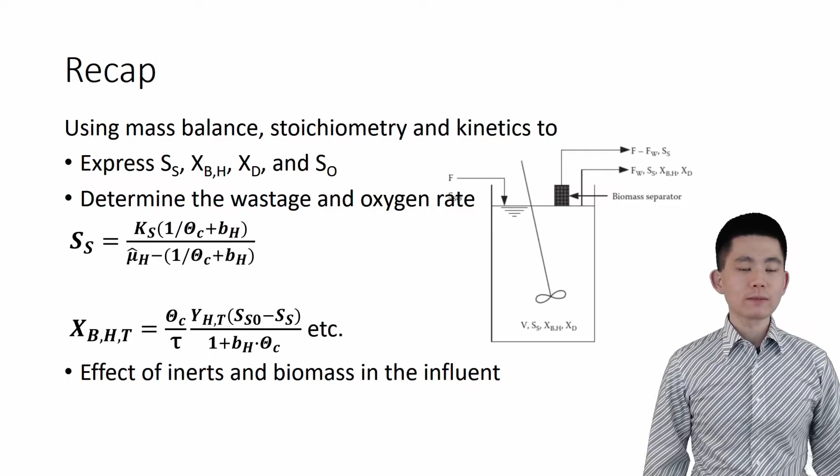Then we extend the model to more complicated influent that contains biodegradable and inert particles and active biomass. In real life, instead of an ideal biomass separator which represents an ultrafiltration membrane, the conventional configuration with a clarifier to settle down the solids after the reactor is more commonly used, especially in water resource recovery facilities.

We can use the same principles to model the conventional configuration, but with three assumptions. After settling, the concentration of recycled MLSS equals that of the wasted MLSS. The MLSS settles uniformly, meaning that the active fraction of MLSS does not change.

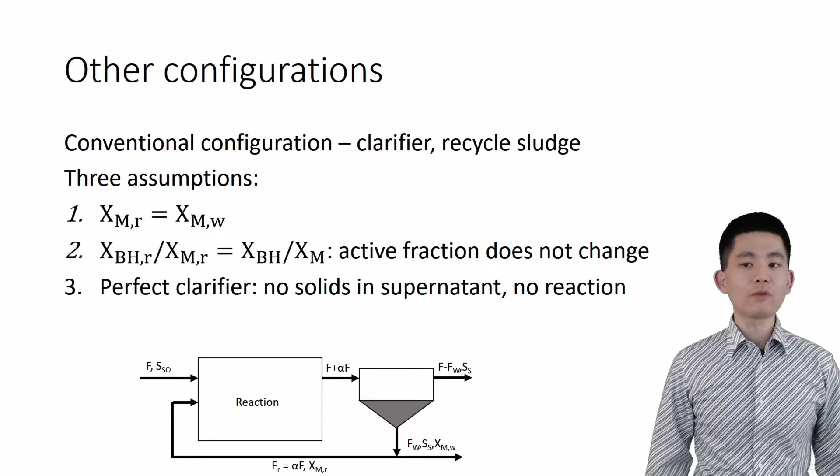Finally, the clarifier is a perfect clarifier, which means all solids entering the clarifier quickly settle, leaving no solid in the supernatant. Therefore, no bioreaction occurs in the clarifier.

Then we can write the mass balance for MLSS for the overall system. This is the boundary for the entire system that we are investigating. Because there is no biomass in the clarifier supernatant, the mass of biomass in the influent minus the mass of biomass wasted plus reaction equals 0 at steady state. This is essentially the same as the biomass separator.

We can then look at the mass balance in the clarifier. Now the system boundary becomes this. Because there is recycling, the clarifier influent flow rate is F plus FR. The supernatant is still 0, as all MLSS is settled in the clarifier.

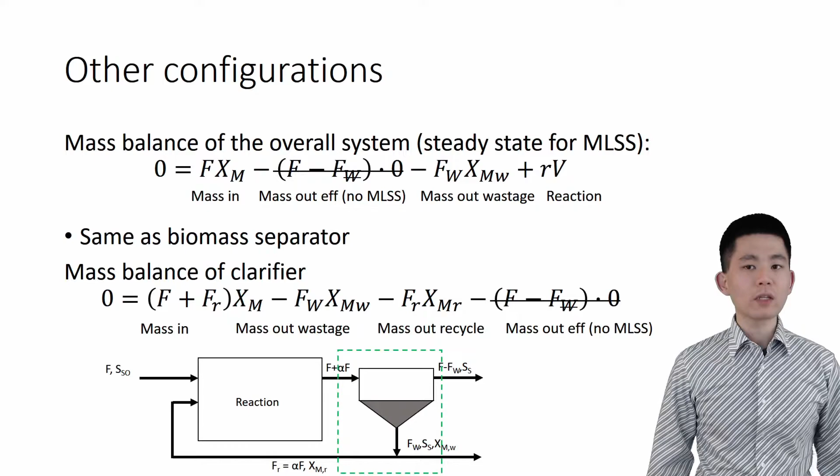From the mass balance, we can use the influent flow rate, wastage flow rate, and recycle flow rate to express the ratio of MLSS in bulk solution and MLSS in waste streams. Therefore, we can express SRT with this equation.

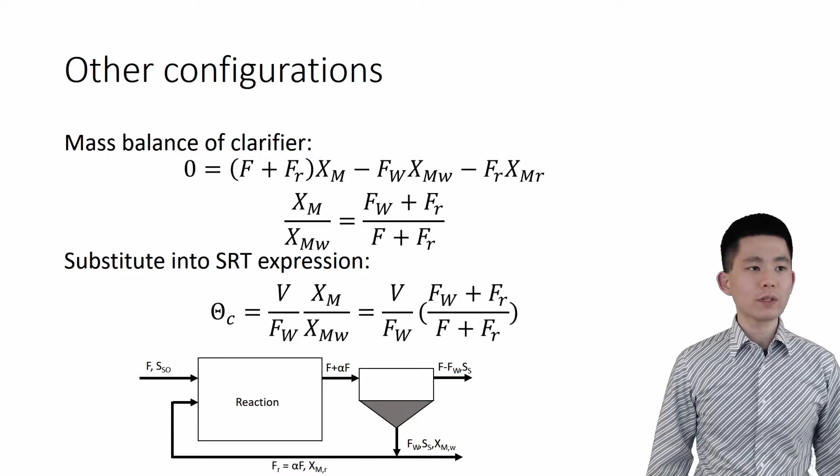Although I have said that conventional CSTRs are most commonly used, in real life, the reactors are designed to be parallel long rectangular reactors that are not completely mixed along their axis, but perform more like PFR, in which the substrate degrades along the reactor. We can model this as CSTR in series, or using the differential volume method that I introduced in topic 8. But the mass expression and solution can be very complicated.

To simplify, we assume that the variation of biomass in the reactor is minimum. This assumption is valid when SRT is over 5 times higher than HRT.

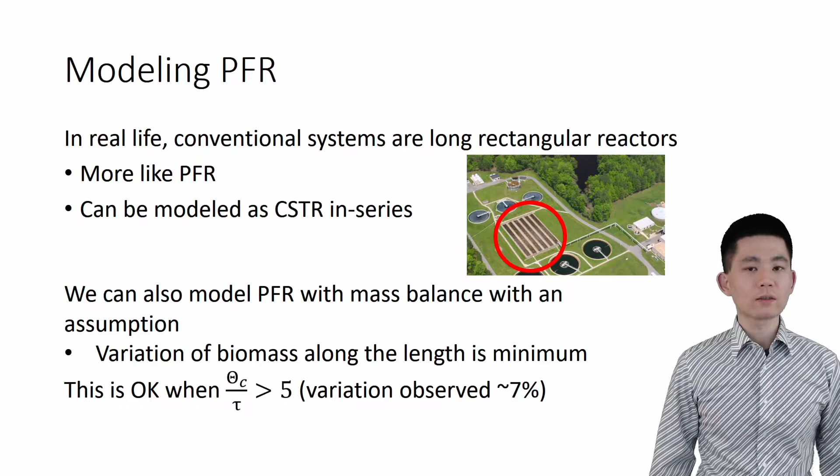We can conduct a steady-state mass balance of the active biomass in the whole system of PFR, followed by a clarifier. We assume that the active biomass concentration XBHT average is uniform in the reactor. There's no influent biomass. The extra active biomass grown in the system is wasted.

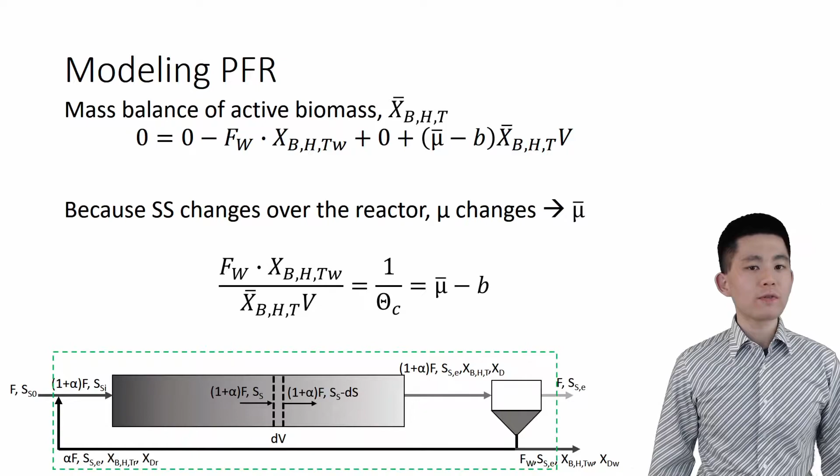Please note that mu average represents the average specific growth rate, as the specific growth rate is a function of substrate concentration, which changes along the reactor. After rearranging, the expression becomes familiar: 1 over SRT equals the average specific growth rate minus the specific decay rate.

Let's do a steady-state mass balance of substrate in a differential volume. The mass of substrate in minus the mass of substrate out minus the degradation equals 0. After simplification, we can substitute the Monod equation in this expression.

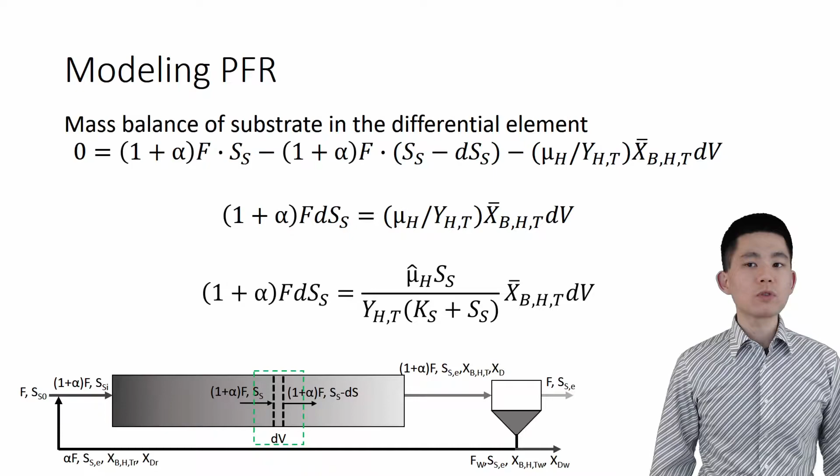We can then integrate both sides of the equation from the entrance of the reactor to the exit of the reactor. This is equation 1 from the substrate mass balance.

SS0 is the influent substrate concentration before being combined with the recycle flow. SSI is the influent substrate concentration after combining with the recycle flow. And SSE, the reactor effluent substrate concentration, are all used in equation 1.

To find their relationship, we need to focus on the entrance of the system. At the entrance, the influent flow combines with the recycle flow before entering the reactor. So the flow rate becomes F plus alpha F, and the substrate concentration changes from SS0 to SSI. We can conduct a mass balance at point 1, the combining point. SSI can be expressed with SS0, SSE, and recycle rate alpha with equation 2.

Knowing equation 1 and equation 2, next let's conduct the steady-state mass balance of substrate for the entire system. At this point, can you pause this video and try to work on this yourselves?

So the mass of substrate that gets in the system through the influent per time, minus the mass of substrate that gets out of the system through the clarifier supernatant per time, minus the mass of substrate wasted per time, minus the degradation, equals zero.

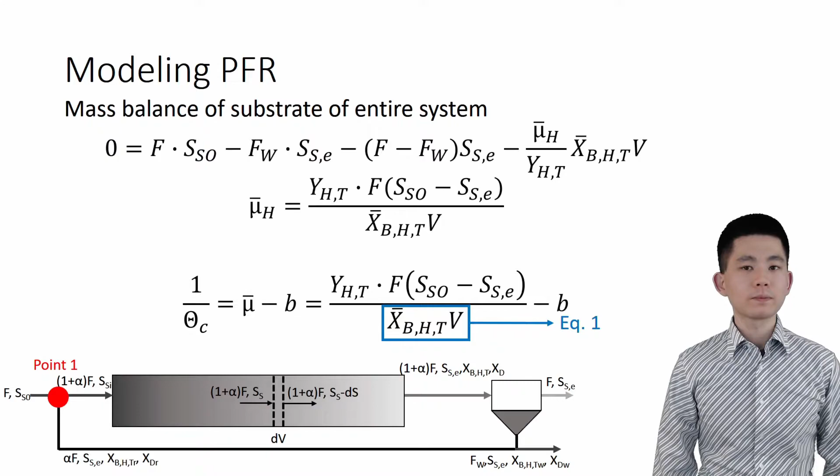After rearranging, we can find that SSI minus SSE can be substituted by equation 2, and this gets us equation 3.

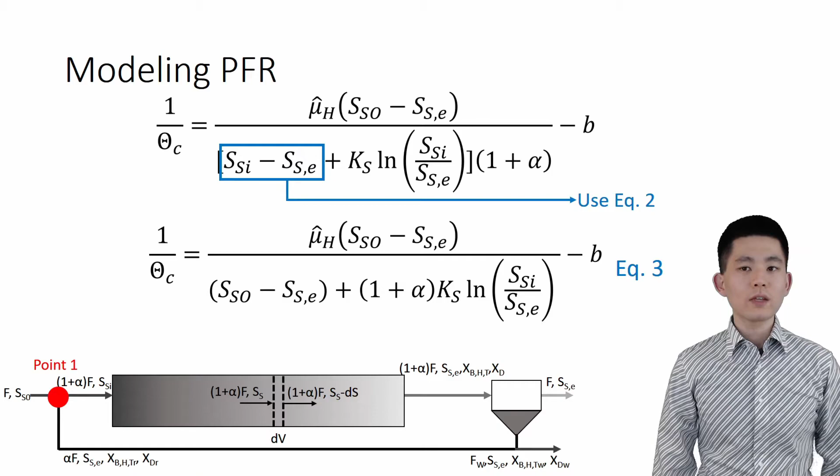We can let E be this. Note that the expression in the natural log is essentially SSI divided by SSE. When the recycle rate alpha is far lower than 1, E can be simplified into natural log SS0 divided by SSE. But alpha typically ranges between 0.25 to 1.5, and this simplification usually does not work.

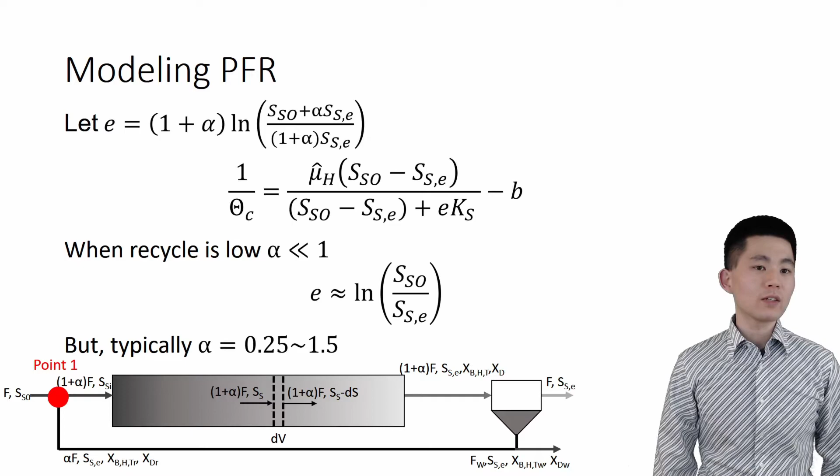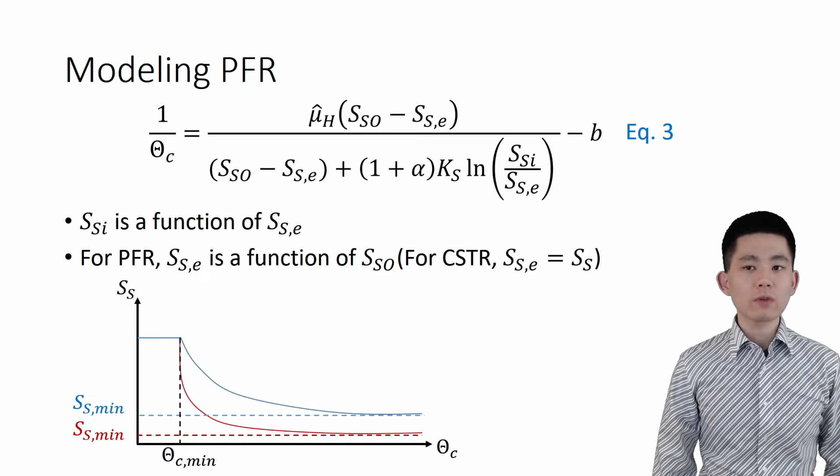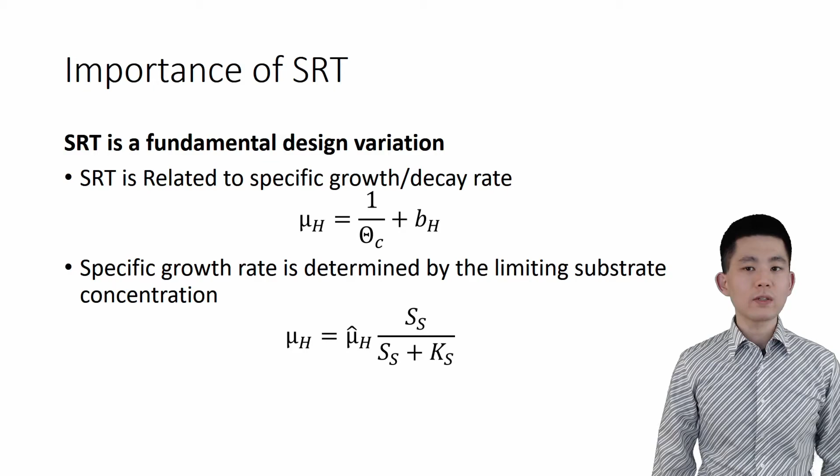From the results of all previous mass balances, we have learned that SRT determines the reactor performance, therefore is a fundamental design variable. It is related to specific growth rate and specific decay rate. Therefore, it influences the biomass growth, substrate consumption, wastage, and oxygen supply for aerobic systems.

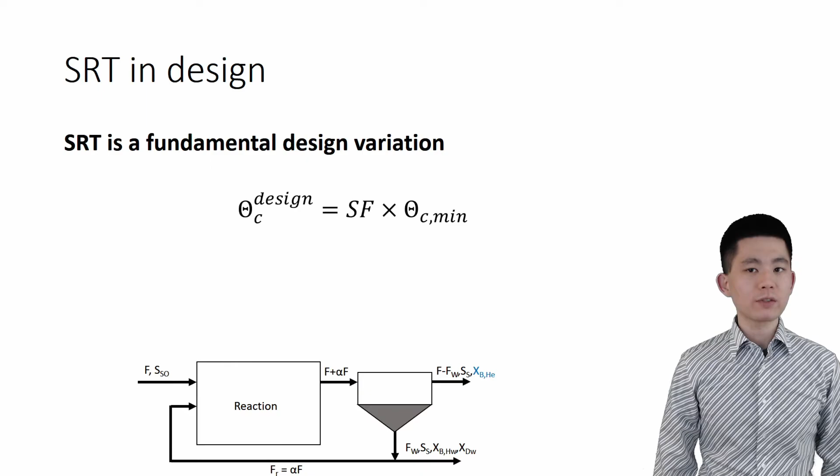During design, SRT is usually designed by multiplying the minimum SRT that leads to washout by a safety factor. The safety factor can be fairly high and is determined based on design and operation experiences. Compared to conventional systems, a lower safety factor is used for high-rate systems for small footprint, while a higher safety factor is used for low-rate systems for high effluent quality.

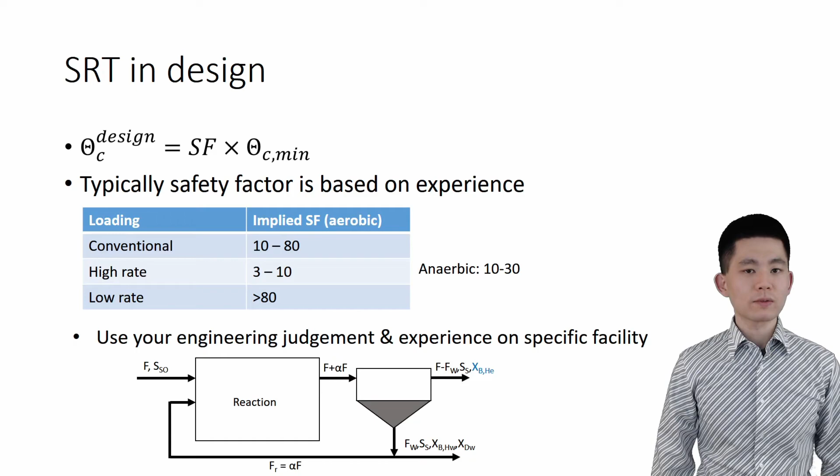When you are designing a reactor, you need to make engineering judgment based on feed characteristics, flow fluctuation, regulation, footprint, capital, and operating budgets. But for a system with multiple reactors in series, such as the 5-stage Bardenpho reactor designed for biological nutrient removal, the specific growth rate is reactor specific as the substrate concentration in each reactor varies.

SRT, on the other hand, is defined for the entire system. It is the mass of MLSS in all reactors divided by the mass of MLSS discharge per time.

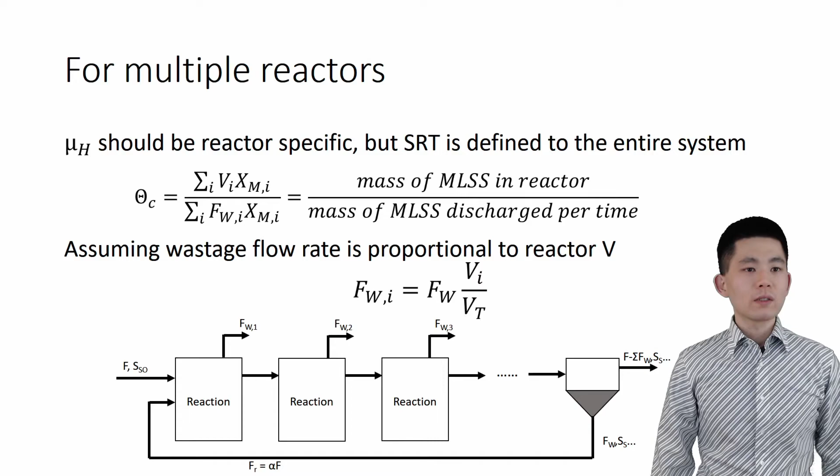If we assume that the wastage flow rate is proportional to reactor volume in a Garrett configuration, then SRT is the total reactor volume divided by total wastage rate, same as a single Garrett configuration with no recycling.

Can you think about the SRT expression for multiple conventional CSTR with recycling? Yes, it is still the same.

And if we assume that the solids concentration is the same in each reactor, the time that solids spend in the reactor is proportional to the reactor volume.

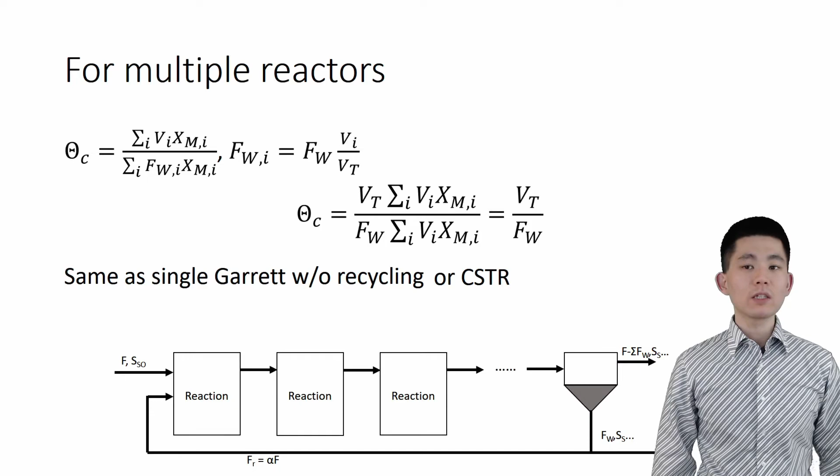In real life, the clarifier is also not ideal. Not all biomass is settled, and there might be some reaction occur as a result. In that case, the SRT needs to include the biomass concentration in the clarifier.

It is the mass of biomass in the reactor plus the mass of biomass in the clarifier supernatant, divided by the mass of wasted biomass and effluent biomass per unit time. And this is similar to multiple reactors in series.

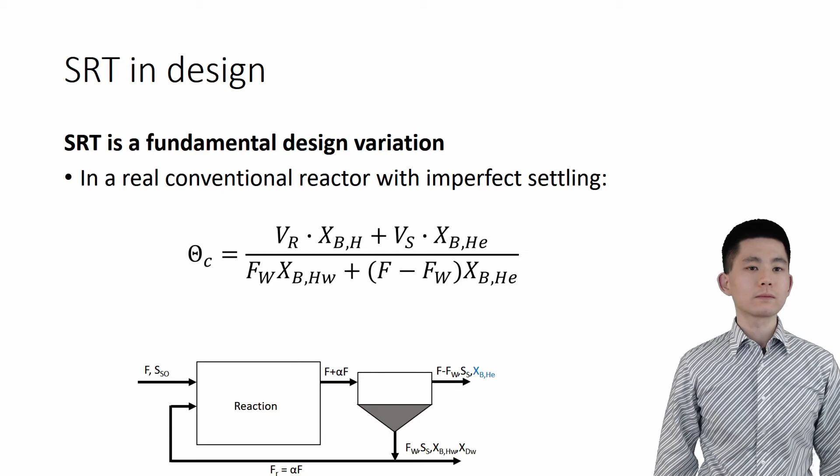Because it is hard to unify the SRT for the overall system and the specific growth rate in each reactor, in systems with multiple reactors in series, process loading factor is used. It is the specific growth rate divided by yield.

After rearranging, it can be expressed as the mass of substrate consumed per time divided by the mass of active biomass. But because the active biomass is hard to measure experimentally, the process loading rate can be defined as mass of substrate consumed per time divided by the mass of MLSS.

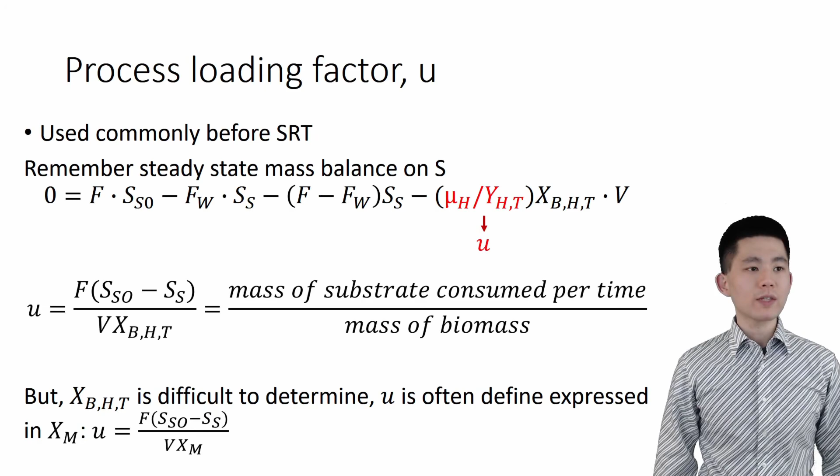Similar to process loading rate, food to microorganism ratio is also used as a design variable. It is the mass of substrate fed to the reactor per time divided by the total MLSS in the reactor. It is still commonly used, especially in aerobic systems, as it is simple and intuitive.

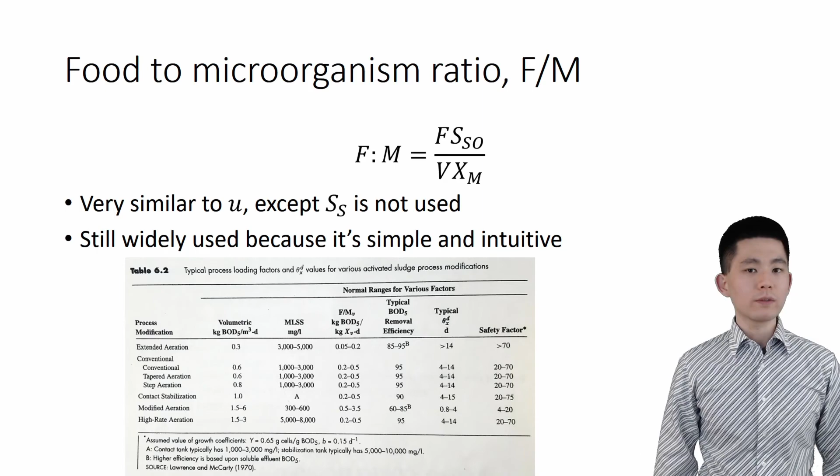Another design variable is the volumetric loading. It is the mass of substrate fed per time per reactor volume. It is still used to compare similar biological treatment systems treating similar wastewater.

Of course, with the help of computational model, we can get a much more detailed and accurate view of the performance of complex biological systems with different flow rate, wastage rate, recycling rate, or even step feeding and varying aeration.